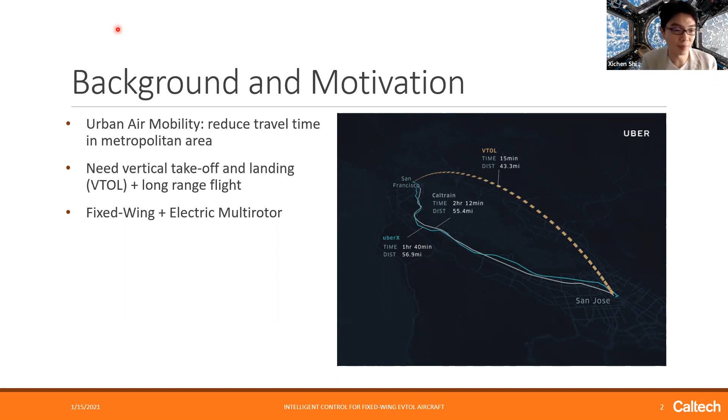It's natural to combine fixed wing aircraft with electrical multi-rotors, because now you can have efficient longer range flight while using multi-rotors to take off and land vertically. But there will be challenges stemming from this hybrid concept, because interactions between different rotors and wings become complex and hard to model in most cases. Furthermore, disturbances from the environment can also be complex to model since we're operating in cluttered urban settings. That means the autonomy onboard the vehicle requires an enhanced level of precision, safety, and intelligence.

Here's a montage of different commercial solutions that have been proposed and prototyped to date. You can see most of them having this main wing and more than 8 vertical rotors in this hybrid design. In the middle of this montage is one of our own CAST autonomous flying ambulance projects. Here we show a render of one of our designs. I eventually built those designs into functional prototypes to test some of the theories we developed for the autonomy aspect.

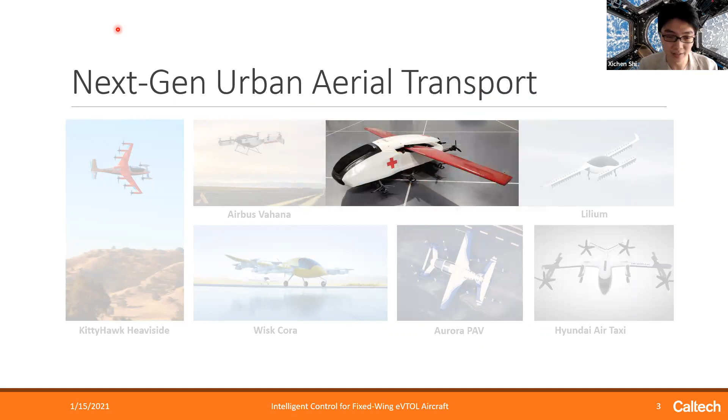So this work is roughly divided into two parts. In the first part, we'll cover various aspects of fixed-wing eVTOLs, talking about why their benefits exist, where those benefits come from, how to design the control system, and how to improve certain design aspects. In the second part, we'll discuss more novel methods in learning, as well as in actuation delay compensation.

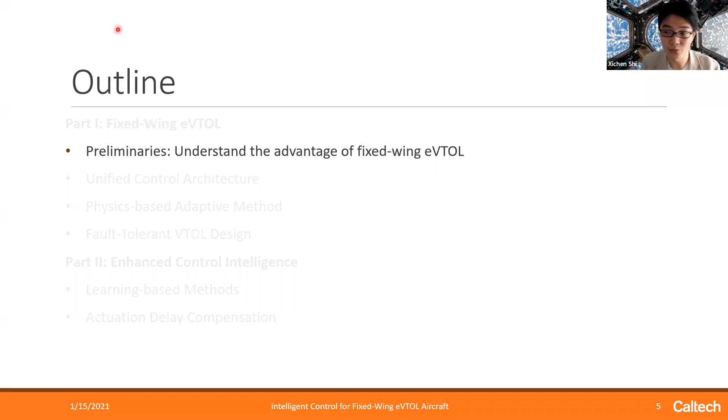Let's first lay some foundations and try to understand what is the advantage of having a fixed wing eVTOL. We can use disk momentum theory to understand, for a rotor in ascending, hover, and descending flight, how much power is required for a certain area of the rotor generating a certain amount of thrust. By balancing the mass, momentum, and energy equations, we can eventually get a relationship calculating the induced power needed to satisfy those thrust generation needs.

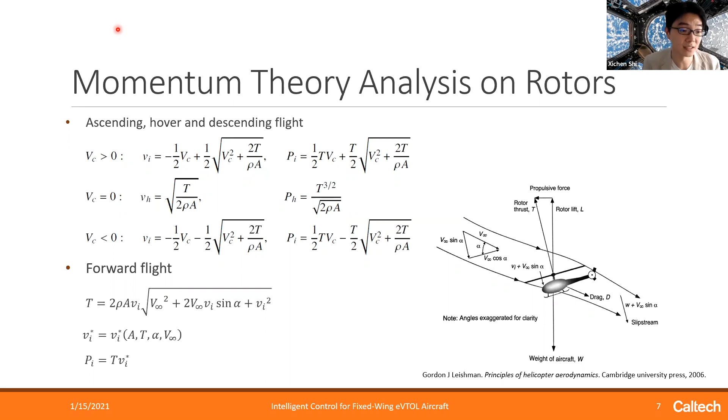Similarly, we can do this for forward flight, except it's a more complex case here, because now your flow can be coming at an angle of attack with respect to the rotor plane. Nevertheless, we can get a similar relationship using the thrust generated and the induced velocity from the rotor plane. Apart from induced power, there's also rotor profile power, which is the power needed to rotate a rotor through the air, and also the amount of power needed to overcome the forces generated on the wing.

For battery or electric vehicles, we have a battery model that determines how much time the battery would last given its capacity and the power load. Now, putting everything together, what we try to understand is how much power is needed for different flight modes.

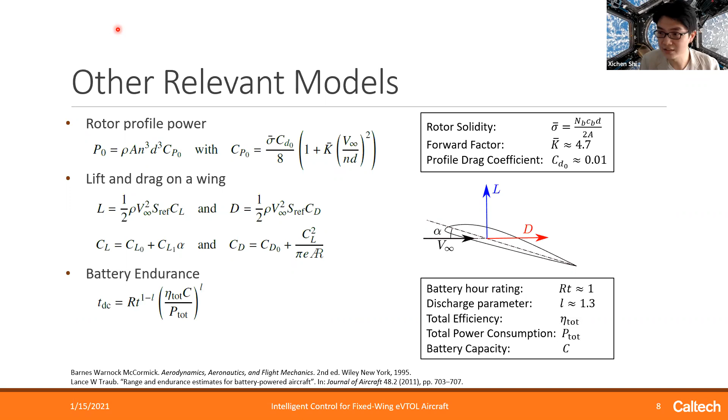It's a simple case for hover flight: all your vertical rotors would be balancing out the weight of the aircraft. Moving on to VTOL forward flight, now your rotors tilt the vehicle in the direction of flight. At the same time, the rotors satisfy both the weight and the drag caused by the aircraft moving through the air. Additionally, some downward lift may be caused by a downward angle on your wing surfaces.

For more mixed flight modes, your wing will be generating most of the lift to counterbalance the weight, with any additional lift compensated by the vertical rotors. In this case, you'll be flying flat and your back cruise rotors can be used for compensating for drag.

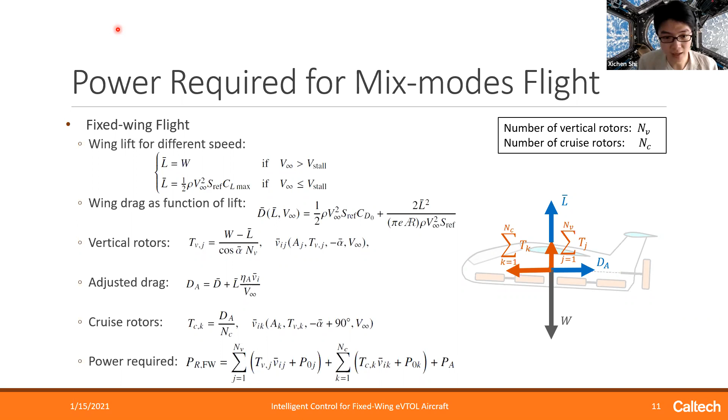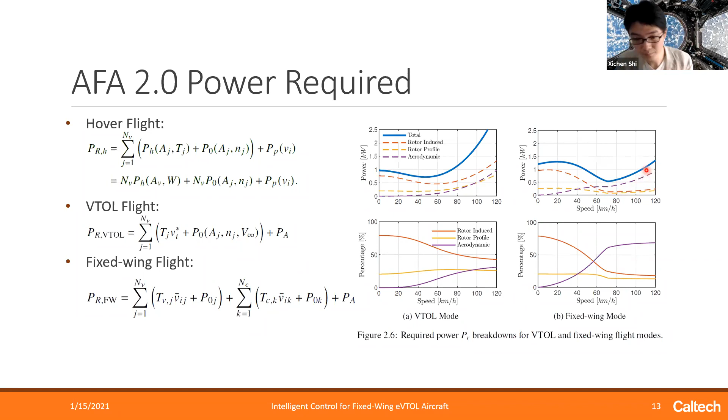We can compare them side by side and also incorporate the electric range equation and battery capacity equations to calculate the amount of time your aircraft can stay in the air—what we call endurance—and the distance your aircraft can travel, or its range.

The graph on the left shows the power required and the endurance. On the right is a pseudo thrust, which is power divided by forward velocity, and the range. As you can see, even in this small fifth scale model, we can achieve 2 times improvement in both range and endurance, and we expect this to also hold for larger scale aircraft.

This is the main reason, using first principles and physics, we can understand the need for a fixed wing VTOL hybrid. Xichen, did you define what AFA stands for? Yeah, we did—Autonomous Flying Ambulance, which we have at Caltech.

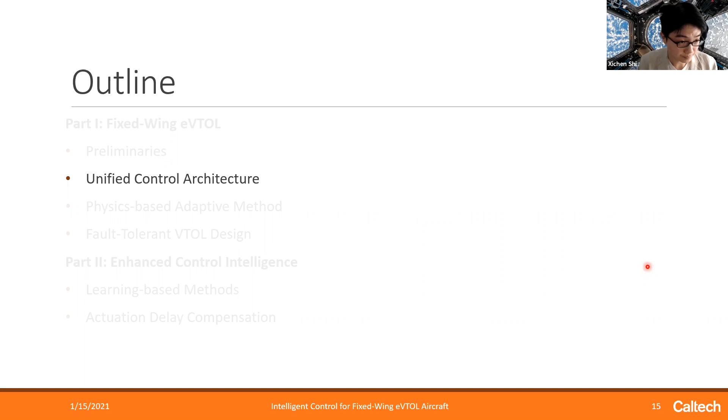So having the aircraft now, how do we design a control system for it? We already know that for VTOL multi-rotor flight, the aircraft will tilt in the direction of flight for the thrust generated by the vertical rotors.

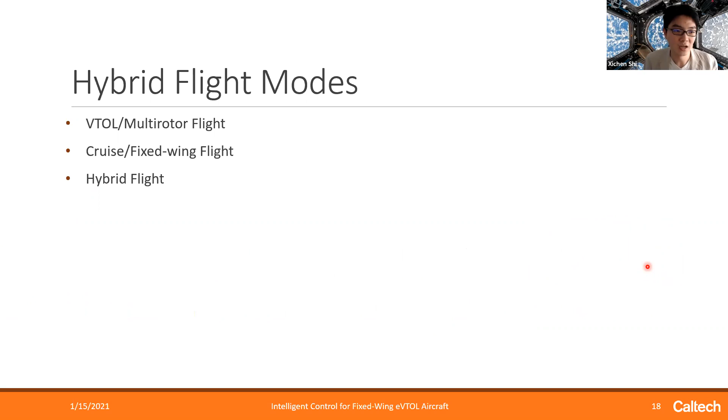For cruise flight, the wing generates lift while the back rotors generate thrust for flying forward. Our hybrid flight will have something in between: at lower flight speed you fly like a VTOL, and at higher flight speed you transition into a fixed wing aircraft.

There was a lot of prior work trying to understand how to transition from one mode to the other. Usually this requires two controllers, one for each flight mode, stitched and switched together. If there are tilt angles, you can schedule the tilting and control accordingly. If you have a good model of the entire craft, you can optimize it offline and use that trajectory for the online transition.

Or, if you have enough computation power, you can actually solve everything online. Although in practice this isn't very likely, due to the complex model and the computation requirements, since the computation hardware on these flying vehicles is typically smaller.

So in our case, we propose a framework based on feedback control design, where we use the same position, velocity, and attitude controllers throughout different flight modes, tying everything together using force allocation and control allocation blocks.

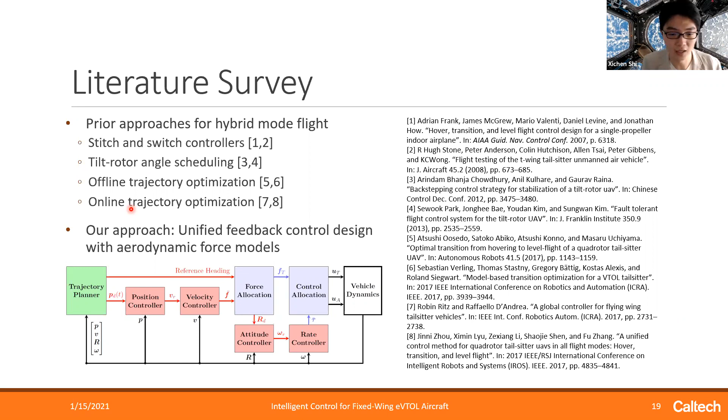For the thruster components, we usually use a model that's linear in the square of rotation speed to calculate the thrust and torque generated by each thruster, and we combine them based on their configuration—a linear mapping from individual thruster forces to the total thruster force and torques.

For aerodynamics, we use non-dimensional coefficients to represent different aerodynamic aspects by calculating the angle of attack and angle of sideslip, which are the relative angles of the wind onto the airplane.

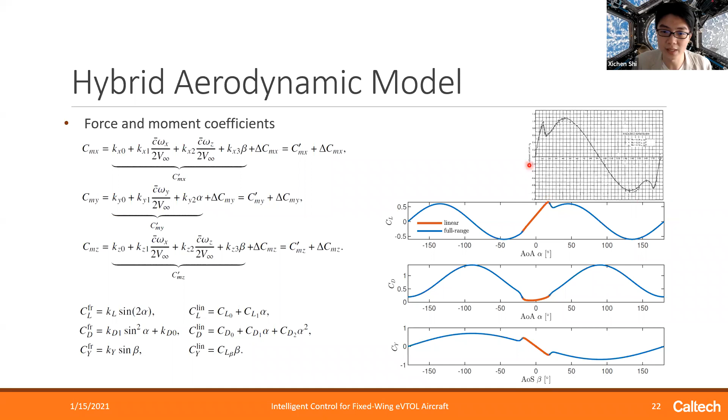We use a blended method to combine a linear aerodynamic model with a nonlinear one, because in the linear region you have a monotonic rise of the coefficient with respect to certain angles, followed by a stall region. Across the full range from -180 to 180 degrees, you see a more sinusoidal or trigonometric relationship. This model can be tuned to agree pretty well with experimental data tested on wings and airfoils.

Now, our architecture consists of several parts. First, we use force and torques as control input to design position and attitude control. It depends on the force that's being commanded. We have to allocate the force by determining the attitude, R_d, which will determine how much aerodynamic force we can generate.

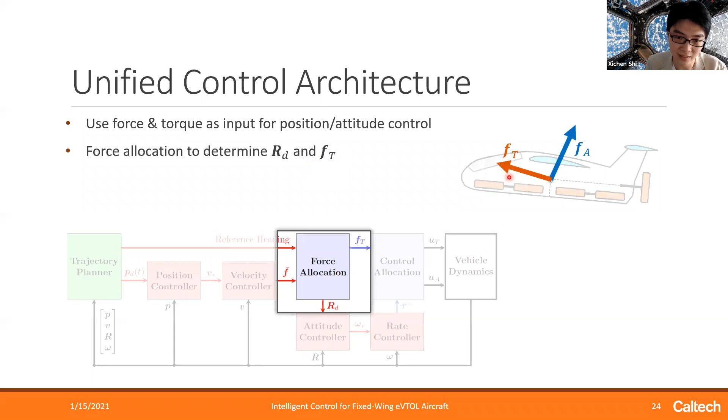And then the control allocation will determine individual thruster forces and also aerodynamic surface deflection, if there is any. Using force and torque to design controllers makes the problem very easy.

Here we just present a simple globally exponential position control by using the force as the input. We can prove this has nice properties, given that your commanded force can be satisfied within some bound.

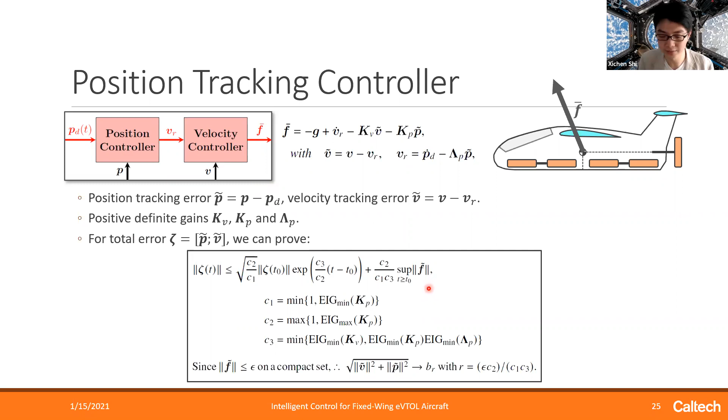So for force allocation, the first step is determining desired attitude. For low speed, all we have to do is ignore the aerodynamic forces and try to align the rotor in the direction of flight, just as a multi-rotor would fly.

For higher speed, you will have to prioritize wing lift by calculating the desired angle of attack, and then try to get a rotation matrix from our current frame to the desired frame.

And then, looking at the current state of the aircraft, we can subtract the amount of aerodynamic force that we estimate the aircraft is generating from our desired force, and let the rest be satisfied by the thruster forces.

But oftentimes it's not possible to satisfy all kinds of thruster forces, so we apply a mask to get to it. For example, in this case, only body Z and body X force are achievable, where Y force is usually non-achievable.

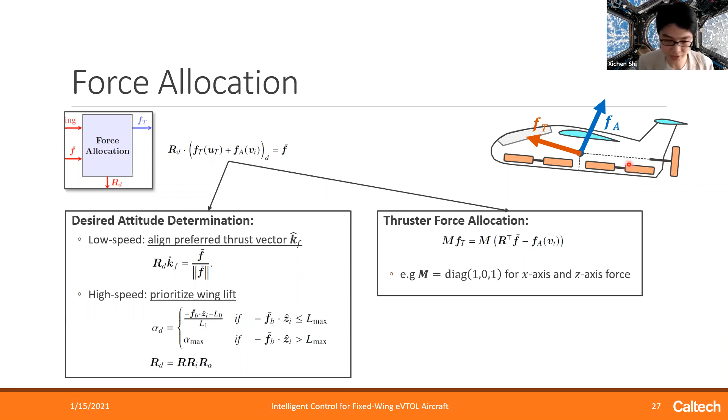Now the next problem is control allocation. The problem is, given the thrust and torque, what are the individual commands given to the rotors? We know the mapping is a linear mapping.

W equals BT. W is the combined force and torque; here we call it the wrench. Usually we have a feasible control space, the maximum amount of thrust each thruster can generate.

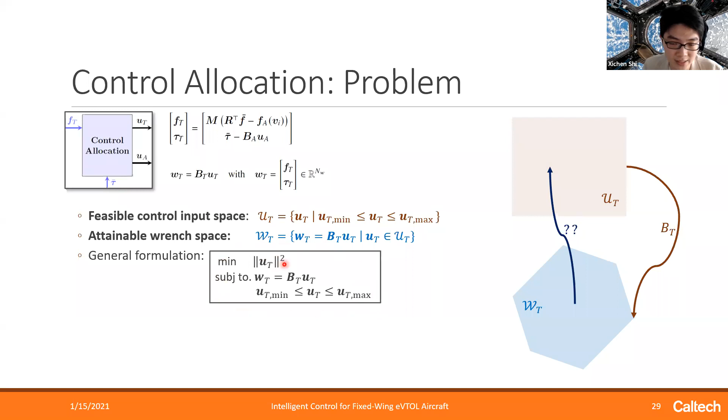So the problem would be, graphically, given something inside the attainable wrench space, what is the control inside the feasible control space? It can be formulated as a QP to minimize the effort of control while satisfying all the needs and feasibilities.

So obviously you can solve that optimization problem, but it would actually be slower than needed, because control allocation happens on the lowest level of the entire hierarchical architecture and requires the fastest update rate. So in practice, often we will use a simple linear mapping.

For example, a right pseudo inverse. The right pseudo inverse is the optimal solution to the original problem if we don't have an inequality constraint. However, simply applying this right pseudo inverse onto this polytope attainable space here, you wouldn't get the feasible space. You would get some space that could lie outside the feasible space, meaning you will have saturated control inputs.

So how do we handle it? One solution we propose is to have an offline optimized inverse mapping, BT prime, so we can minimize this with some problem setup.

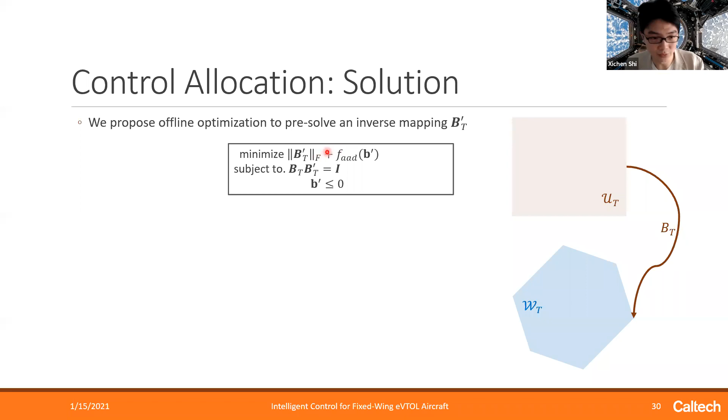We try to minimize the potential effort of control. We also want each rotor to have a similar amount of thrust during allocation, so their deviations are small. We can also fit an applied range space, something like a hyperrectangle, inside this polytope, such that we can show in simulation that by applying this optimized inverse, the space you recover will always be inside the feasible control space, so we avoid the saturation problems.

Or if you still have saturation, we can also do a recursive control allocation, by eliminating saturated control signals one by one, recursively.

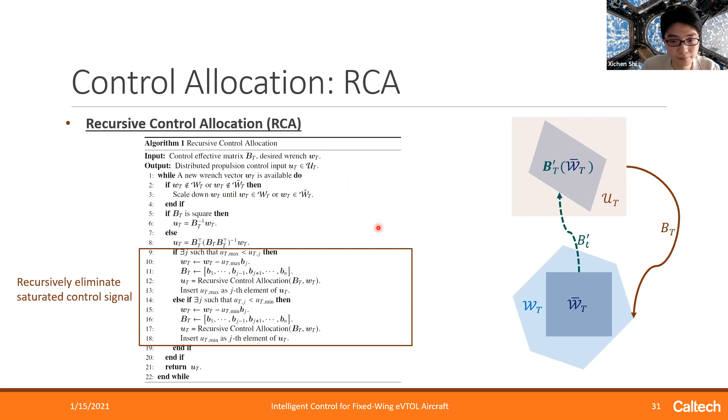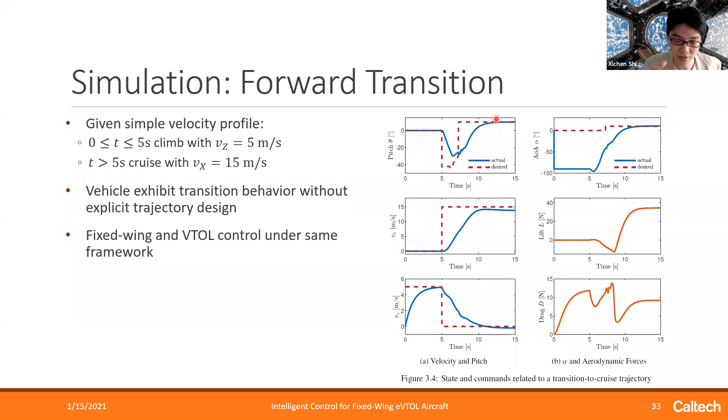Putting the proposed architecture through a simulation environment, when given a very simple velocity profile, simply telling the aircraft to go upwards for 5 seconds at 5 meters per second and go forward at 15 meters per second, the aircraft exhibits a very natural transition trajectory. This trajectory wasn't designed beforehand, rather it's exhibited by this architecture intrinsically. In the beginning, the allocation tells the aircraft to be flat, 0 pitch, going upwards. At some point it pitches downwards to gain speed, and when there's enough speed, it goes back to around 0 pitch for fast forward flight. All of this is achieved intrinsically within the architecture.

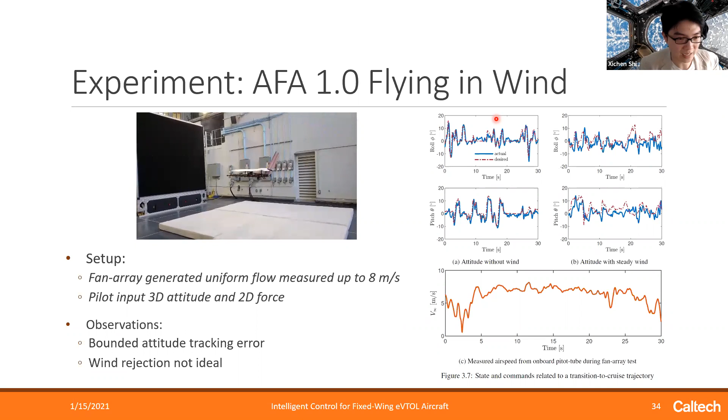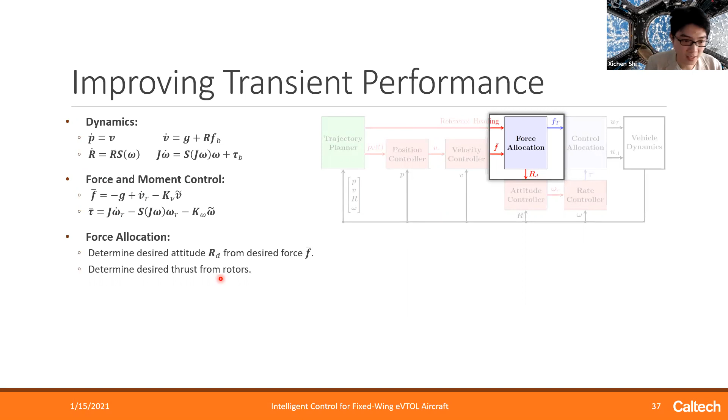What we propose instead is a physics-based adaptive method. There's a lot of adaptive control literature, for example on linear parameter models, or composite adaptation incorporating both tracking and prediction errors. For flight control, there are works estimating angle of attack and angle of sideslip online, but mostly for estimation purposes, not control. However, there has been work on adapting aerodynamic coefficients or neural network parameters. In our case, we know force allocation is key to achieving very accurate precision tracking, and the key to that is accurate force estimation.

In this part, we use a simpler vehicle with multi-rotors, fixed wing, and forward rotors, incorporating a novel sensor that gets more information out of the flow. We use the same rotor model, but augmented with the side force of the rotor, which becomes significant during forward flight, and we use the same linear and quadratic aerodynamic models with respect to lift and drag as before.

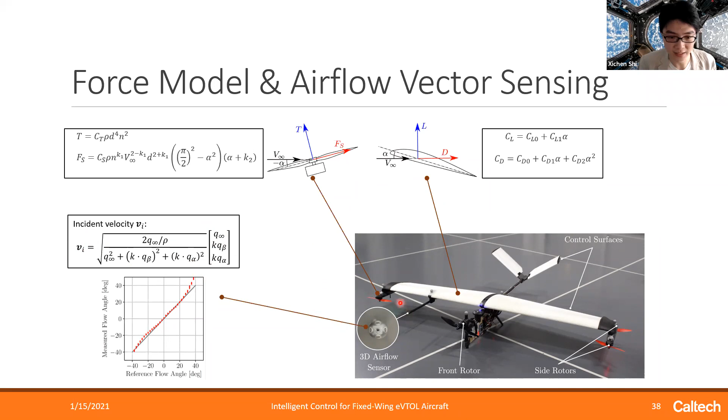We have novel sensors that use differential pressures to back out an incidence velocity onto the main wing. Combining them together, we can write the body force as a linear combination of parameter vectors and a basis function matrix.

With this form, we can design a composite adaptation scheme that adapts both the tracking error and the prediction error. The prediction error is simply the difference between the measured acceleration after filtering and the predicted acceleration after filtering. We can further augment this via a recursive least square method with exponential forgetting, so the online adaptation scheme is effectively solving a least square problem with an exponentially decaying window.

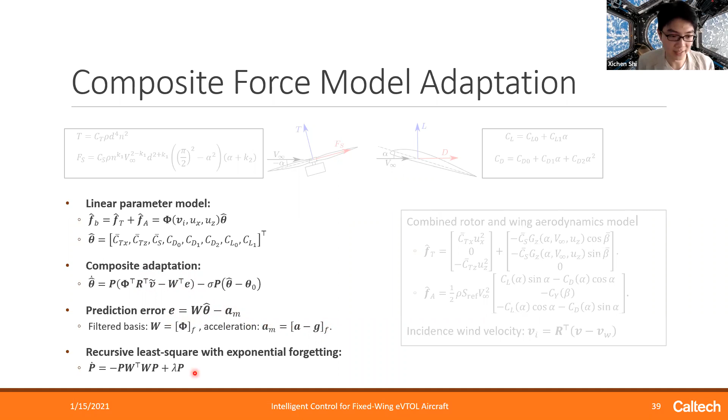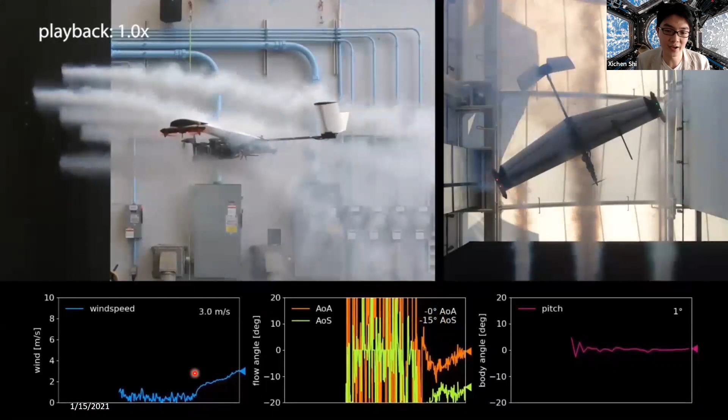We test this in the fan array wind tunnel in a motion capture environment for feedback position control. In the first showcase, as the airspeed ramps up, we see the aircraft align itself with the flow to satisfy the additional aerodynamic forces on the wing. As speed ramps up, angle of attack and angle of sideslip, initially unregulated, eventually become regulated toward some angle determined by the force allocation, and the aircraft pitches up slightly to generate the thrust and lift needed from the wing.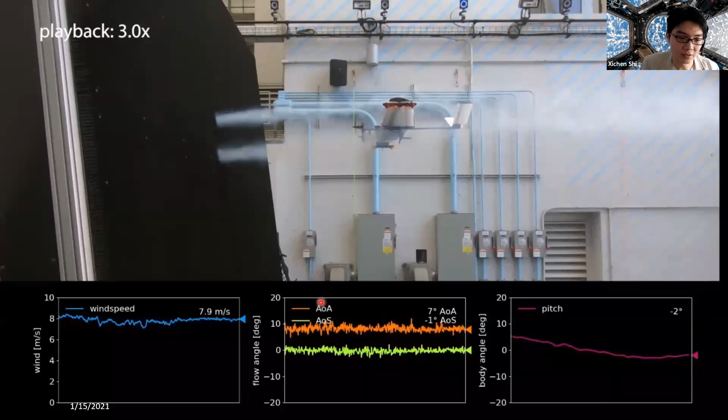In the second showcase, we tilt the entire wind tunnel from 0 to 9 degrees and back to 0, while keeping the wind speed relatively constant, so the wind direction changes. Internally, the allocation keeps the angle of attack and angle of sideslip relatively constant, but we see a varying pitch as the aircraft tilts into the wind and then back flat again, to fly according to what the wind direction demands.

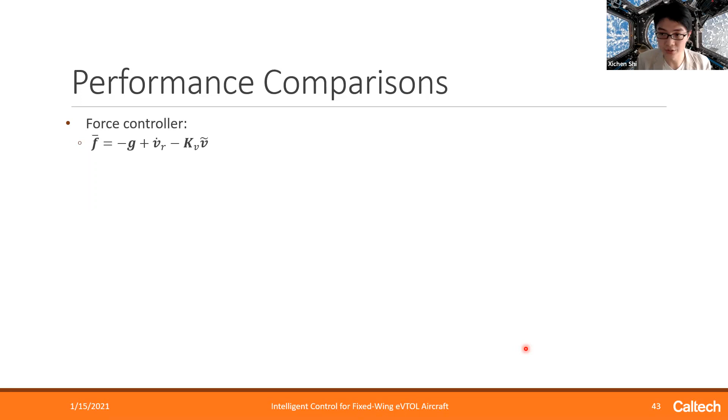So we have this simple force controller as before, augmented with a composite adaptive controller. We would like to compare it with a baseline PD and PID controller where the parameters are fixed. Those fixed parameters are obtained through wind tunnel testing, and they're fairly accurate for steady state purposes.

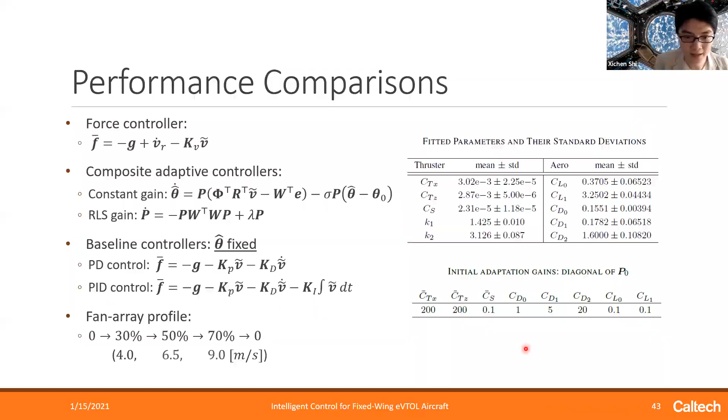But as we'll see for transient effects, they don't perform so well. In this experimental case we'll show next, we'll be ramping the fan array profile from 0 to 30 to 50 to 70%, and then suddenly shut it off. That would roughly correspond to 4, 6.5, and 9 meter per second wind. Now let's first look at PD versus PID controls.

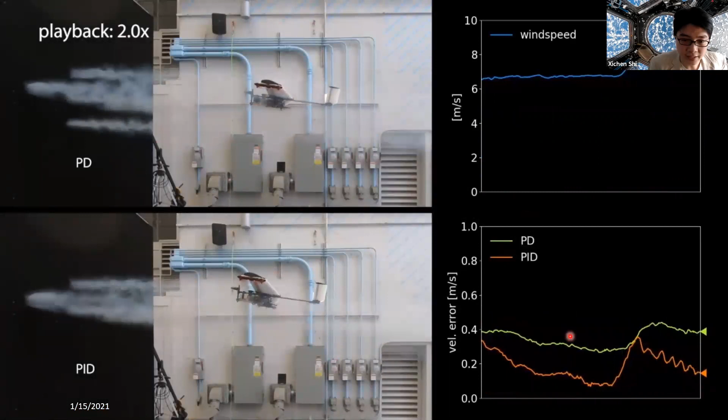The upper plot is PD, the bottom is PID. It flies pretty steadily, except every time the wind ramps up, you see a sudden drift from its held position. The integral control comes back over time, given its integrated power in the I term. But in the end, with a sudden drop off of velocity, you get a huge overshoot from the PID.

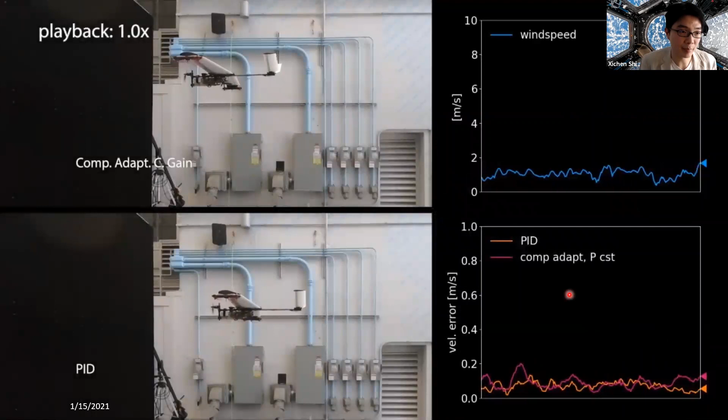Now we can compare PID against a composite adaptive controller. The upper graph is the composite adaptive control, here is a constant gain. So every time, the transient effect from sudden ramp up or ramp down of wind is minimized. Basically there's no visual difference in precision tracking performance when the wind changes, and during the sudden shut off, the overshoot is also minimized.

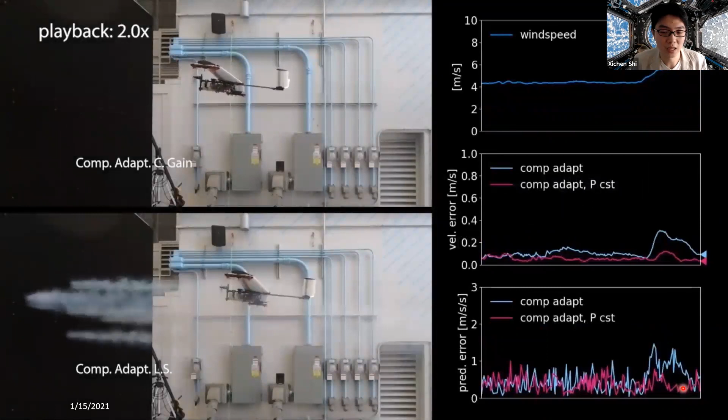The additional comparison we did is comparing the constant gain versus when the gain is updated in a recursive least square fashion. We expect recursive least squares to have better prediction and tracking performance, but in our case it actually did not improve the performance further. In some cases, you can see the constant gain outperforms the RLS.

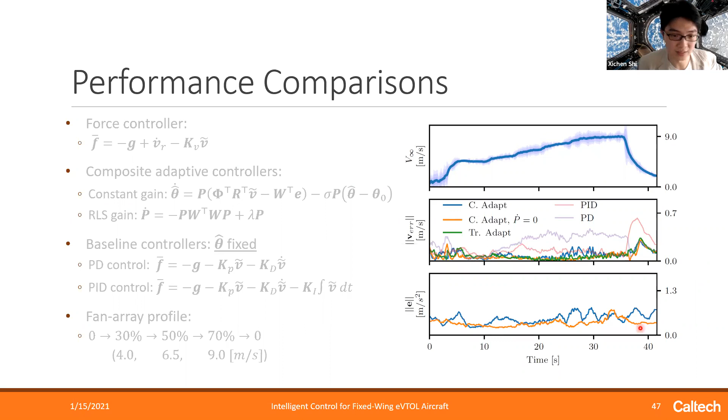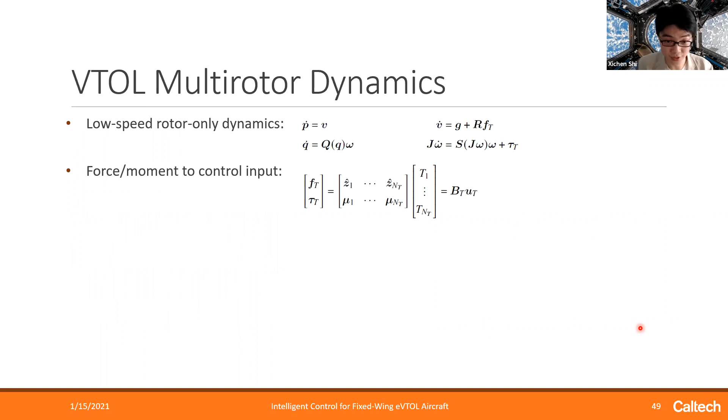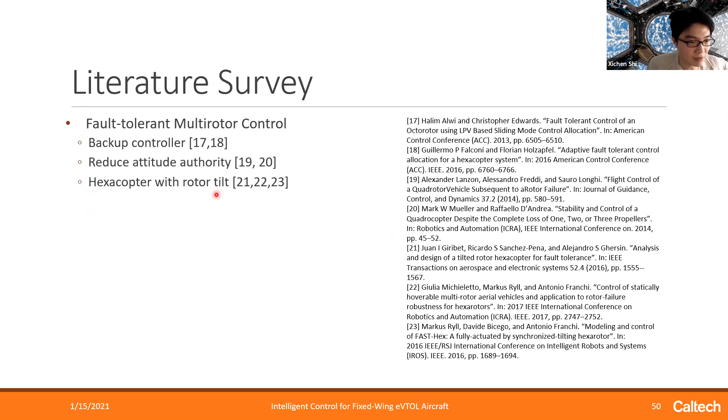The prior work on fault tolerant control usually focuses on having a backup controller whenever a fault is detected, at the cost of reducing attitude authorities. For example, a hexacopter with 6 rotors would lose yaw control completely in the event of losing a rotor, but you can recover some of the authorities by having rotor tilting out of the plane.

So in this work, we focus on the design aspect: how to get a configuration that's most optimum for different failure cases. First, we define a static hover as eventually a problem of just reaching 0 attitude, because through position and force control, the convergence of attitude will eventually become 0 in a static hover.

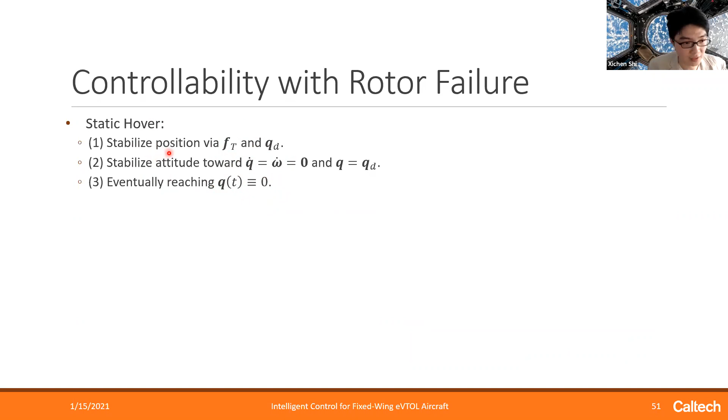Given the definition of null controllability as the system's ability to return to a 0 state given feasible control inputs, we find that for the attitude subsystem to be null controllable, meaning for it to become stabilized back to 0 attitude, it's required that the thrust, the torque, 0 torque, is in the interior of the moment space. So what does it mean?

It means that basically the origin, when you have a moment space in R3, your origin has to be on the inside of it. So it cannot be on the boundary or on the outside.

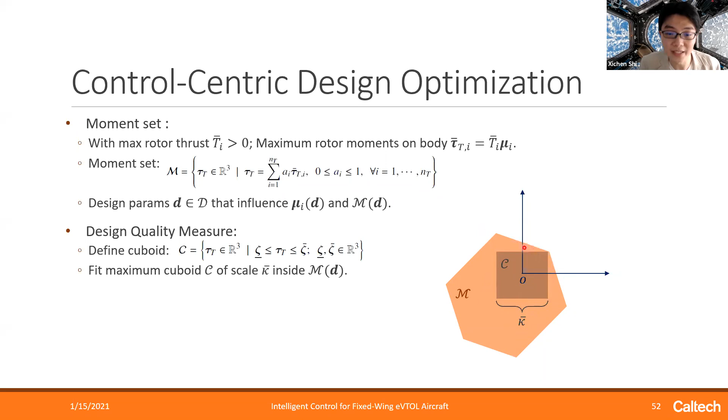We define this moment space by using the maximum thrust and the rotor configurations. We know this moment space could be determined by some design parameters, such as rotor locations or orientations. We define a quality measure of controllability by putting a cuboid fixed at the center at origin with the maximum size inside this moment space, and we define its scale as kappa bar, and that's our metric. Basically, the bigger this box is, the bigger the controllability of the aircraft in various cases.

Now, the fault tolerant design procedure is as follows. We first have a set of all possible failures and also the parameter space. For each of those elements, each failure case, each design, we can optimize this convex problem to solve for that metric kappa bar we just discussed.

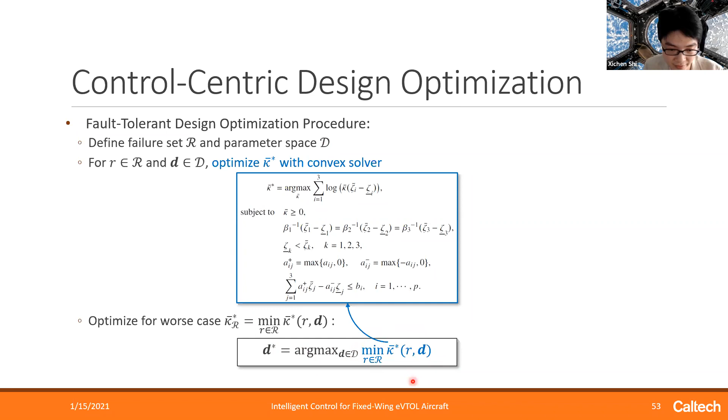And then we optimize for the worst case behavior. We maximize this metric for the worst case failure case, worst case rotor failures. So among all failures, what is the minimum, and we try to maximize the minimum.

So here's an example with that AFA 1.0, by designing the rotor tilt angles symmetrically, bounded from 0 to 20 degrees. In this case, it turns out we can have an optimum design parameter of 19 degrees and 13 degrees respectively.

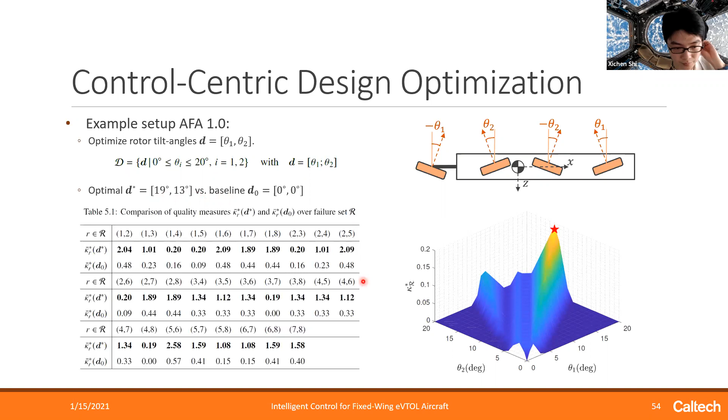Comparing to the baseline of only non-tilting at 0 degrees, we can see the controllability metric improves on all rotor failure cases. Especially when failing rotors 3 and 7, the baseline case will have that origin on the boundary of the moment, meaning it cannot generate the uncoupled moments in different axes.

Whereas we can recover some controllability by having the optimal design, you can see the origin is on the interior here. In another case, when failing rotors 1 and 8, we can see a significant increase in the moments in the metric by fitting this cuboid inside this moment space.

For the same failure case 1-8, we simulate the failure in flight and compare control performance by perturbing roll, pitch, and yaw axes separately. For baseline, roll and pitch perturbations have basically no effect on performance, as position holding is relatively well maintained, except when you perturb yaw. During negative yaw, you have issues tracking the desired trajectory because of the loss of authority in the moment space. With an optimal design, we recover some control authority, so this no longer happens.

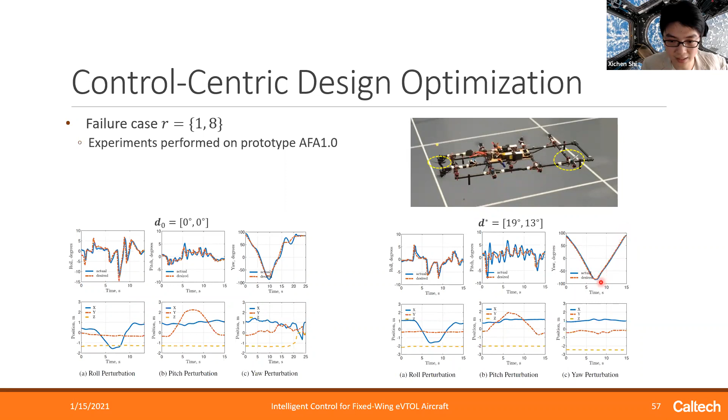All right, so before we move to the next part, are there any questions?

Now let's talk about how we improve control intelligence using learning-based methods, in particular a neural network-based method.

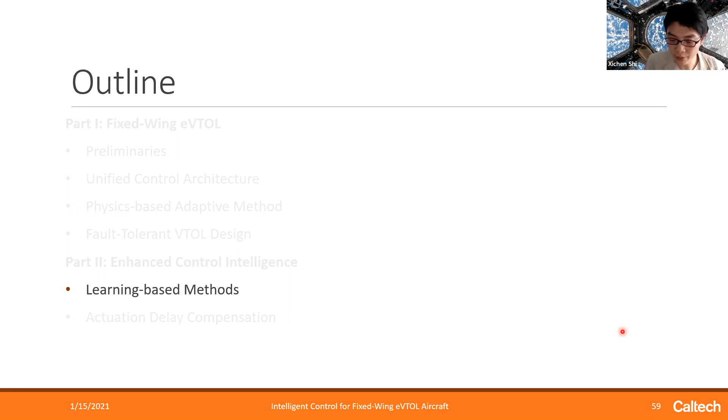So far we have body force and body torques that we model via thruster forces or nonlinear or linear aerodynamic forces. We're pretty confident about the thruster force model because it agrees well with experiments. The aerodynamic model, maybe not so much, so it's natural to think about a data-driven approach for approximating FA and tau A using deep neural networks.

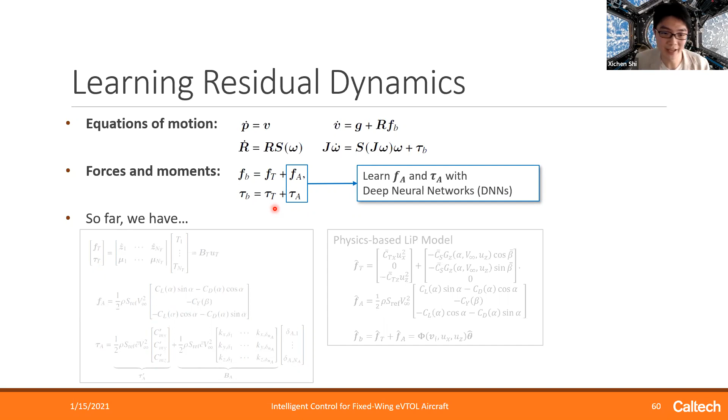Given a lot of research on deep neural networks, there's also been a lot of combined DNN and control work. People have used deep neural networks for system ID, for example on helicopter dynamics, for generating trajectories fed to a downstream controller, and reinforcement learning with continuous actions for control applications. We could also learn inverse dynamics through a DNN and apply a controller to it, or learn Lyapunov functions.

In our case, we'll present two approaches: one is designing a feedback controller when part of your dynamics is represented by a DNN, and also when your full dynamics is represented by a DNN, how you would design controllers and observers and how to train them respectively.

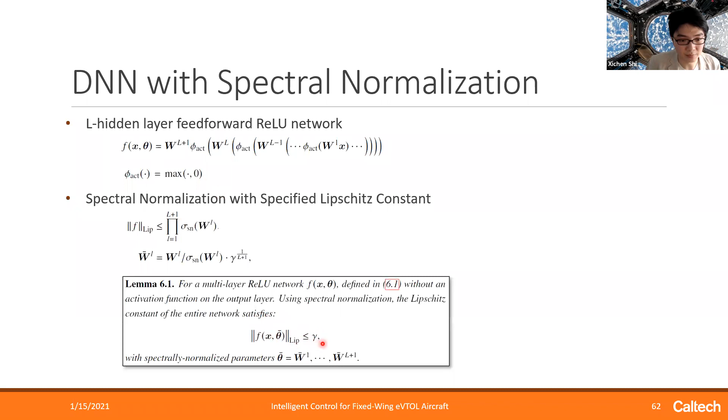Given an L hidden layer feedforward network, where W is the matrix of weight parameters of each layer and phi is the ReLU activation function, it turns out we can regulate the Lipschitz constant of this entire network through some determined gamma by applying spectral normalization on each weight layer.

For control, we want to satisfy the desired force as from the position controller as before. In the case of a multi-rotor, the thrust from the rotors equals the desired force subtracted by the aerodynamic contributions. So we equate that into solving the control allocation problem again, except now our control input shows up on both sides of the equation, because adding this DNN makes the entire problem non-affine in control.

So what we propose is a fixed point iterative method: feeding the control input from the last time step into the neural network, subtracting it from the desired force, and then doing inverse mapping on top of it. It turns out that for this to converge and work, the Lipschitz constant of the network multiplied by the singular value of this inverse matrix has to be less than 1, meaning the entire mapping has to be a contraction.

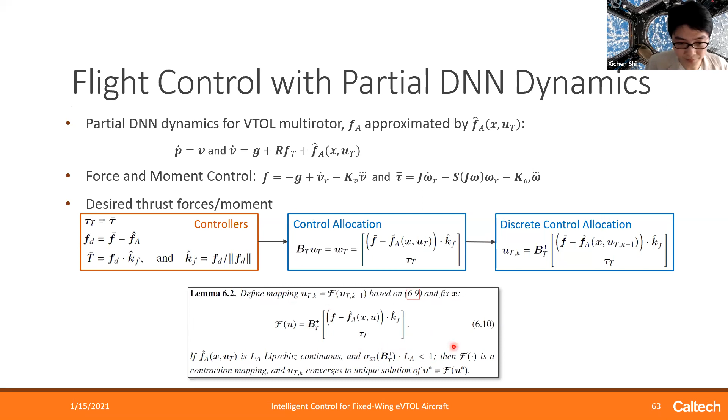With some assumptions — that the projected trajectory is smooth and bounded, that our controller updates are fast enough against some scale factor of our error, and that our learning is effective with bounded learning errors — we can prove the entire closed loop system under this controller is globally exponentially stable, given the gains, the learning error bounds, and the Lipschitz constant of our network.

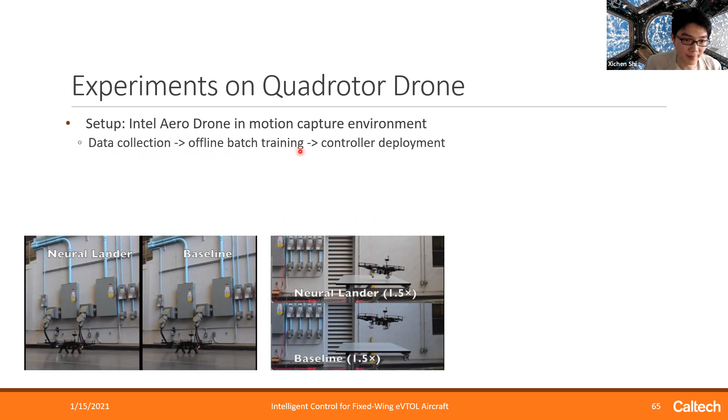To show the results, we apply the method on a quad-rotor drone, the Intel Aero drone here, by doing some data collection first, then offline batch training, and then deploying the controller online.

So on new domains, which are domains we haven't collected any training data on, the spectrally normalized DNN shows better smoothness in its functional predictions, whereas the non-spectral normalized ones have large deviations given data that hasn't been seen before. In practice, this corresponds to a sudden failure of the controller at these data points because it has predicted very large and erroneous forces.

Now for closed loop control performance, we can outperform baselines, for example in landing, by having a very smooth and zero speed touchdown on the ground, where the baseline can't even touch the ground without an integrative term, because it's not considering the actual additional cushioning effect.

Similarly, for vehicles flying across tables, our controller can get as close to the table as possible, while the baseline has trouble accommodating the additional cushioning force from the table, also dropping off when it reaches the cliff.

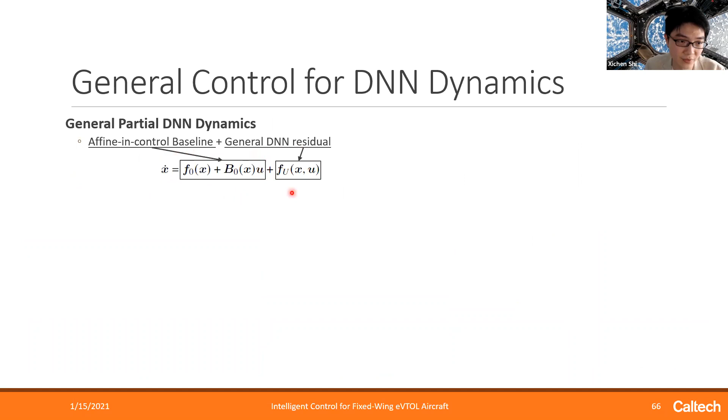So in general, the method applied on flight control can also be done on any fully actuated, affine-in-control baseline dynamic system, augmented by a general DNN residual dynamics that's a function of state and control. We can apply the same principle and prove the same stability using that controller.

The controller is basically the inverse, then feeding back the control input from the last time step. Now this is all good except there's a harsh constraint on the approximator on this residual: the Lipschitz constant of this network has to be less than 1 over the Lipschitz constant of the inverse of that matrix.

That's already known, and when it's known, that means this Lipschitz constant is fixed. In practice, there could be a problem in the sense that when you don't know these additional forces and they become too large or non-smooth, this condition wouldn't hold and you wouldn't get a good controller from that.

So in general, we would potentially represent our entire dynamics as a deep neural network, then design a controller based on that. But the problem is with non-affine controls, how do we do it? Theoretically, we can do it by just solving this equation.

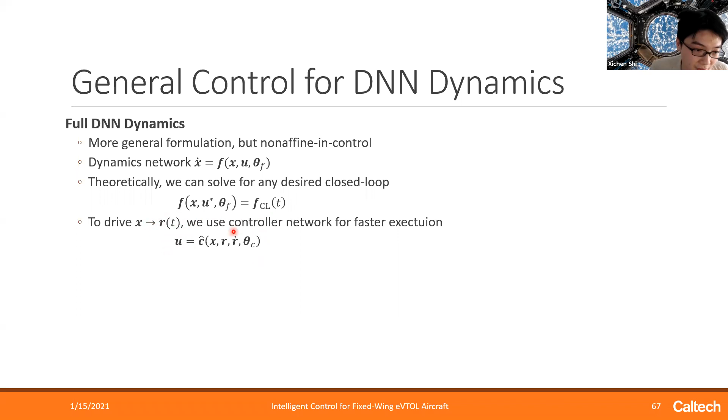We already have the dynamics learned somehow. We equate it to some closed loop behavior we want to achieve. If we can solve it, we have a controller. But instead, we propose to represent our controller with another neural network, parameterized by theta c. Now, how do we train both networks?

So we first have to do some data collection. Given the method we're going to propose is off-policy, this collection can be done by some experts, or can even use the same untrained controller we have to do some random exploration.

During the first stage, we will learn the dynamics by looking at the state, control, and state derivative pairs, and doing supervised learning to figure out what the transition function is. So this stage will learn the parameter theta f for the dynamics network.

In the next stage, using the dynamics network that's already learned, we fix that parameter theta f, and feed it into a Lyapunov derivative estimator. So this is propagating one step forward using our dynamics that's already learned and using our controller that's being learned.

So we optimize this loss function. This loss function penalizes any positive terms of this expression here. So when V dot plus alpha V becomes negative, we penalize any positive terms. When this term becomes negative, the system is considered exponentially stable. When it's not, there could be some issues. That's why we penalize it. So overall, by minimizing this loss function, we can train the network parameter for the controller, theta c.

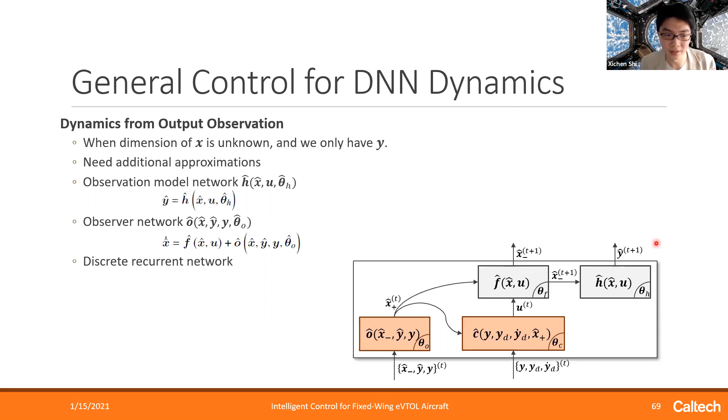So how do we learn it? We learn it using similar methods as before. The data collection is also off policy, so it can be through some expert controllers or some random controllers. But if we're to apply this online, we do this recurrent structure as before. And when we're doing learning, instead of sampling randomly from the data, we actually have to have a sequential trajectory, because our RNN formulation will have to train on a trajectory.

During the dynamics learning stage, we learn by optimizing the dynamics network, the observation model network, and also the observer network. In the control learning stage, we fix these three networks and only learn the controller using a similar approach as discussed earlier, except now it's in a discrete sense. This overall framework can, in principle, learn a more general form of dynamics when it's all represented by a DNN.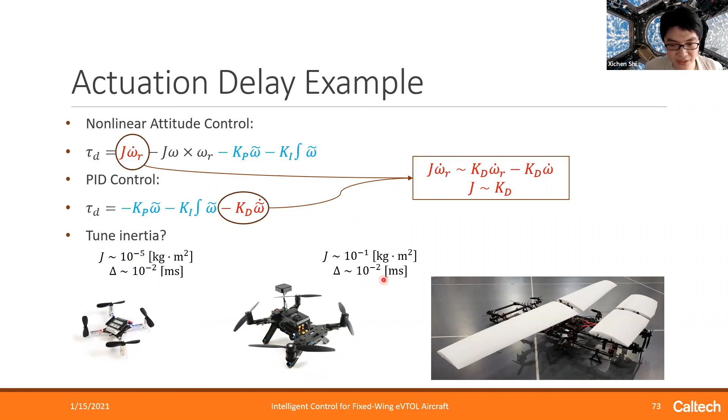But when I moved to smaller drones, tuning inertia no longer worked, except when you tuned it 10 times larger than its original intended value. Further investigation showed that the inertia of smaller drones is several orders of magnitude smaller than the bigger ones, while the delays on the motors are on similar time scales. So the problem must be coming from the delays, and how do we compensate for it?

Delay compensation has a long line of prior research. People have used PID or PIPD controllers on linear systems, and there's been vast work on predictive control by continuously integrating states for future predictions. But these require partial differential equation or functional differential equation analysis. In our case, we still propose a predictive controller, but we focus on numerical integration instead of continuous, and our system updates in a sample-based or discrete fashion.

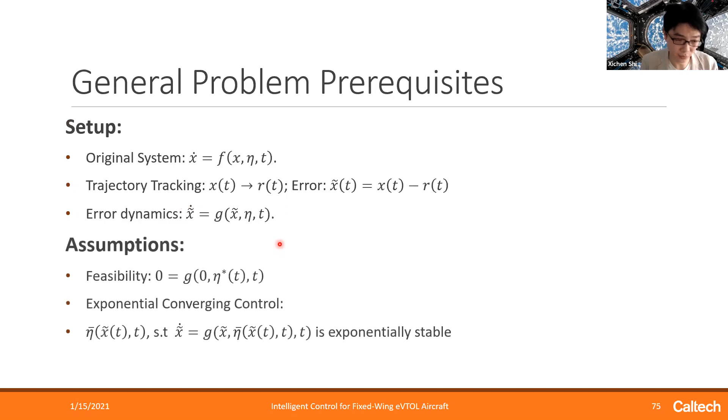Some mathematical setup - skipping through details, but the basic gist is there's the original system, undelayed. We consider, for example, that we already designed a controller for our quad rotors, but didn't consider the delay. We know there's a controller we already designed, eta bar, designed for the undelayed system, that's already making the undelayed system exponentially stable.

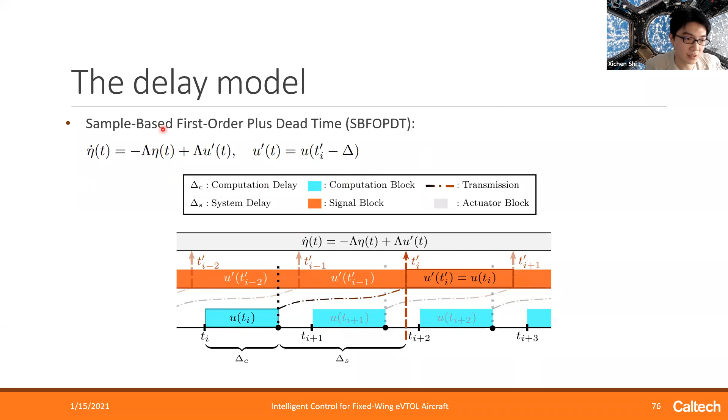And then we incorporate a delay model. In practice, at every time sample TI, we sample some states. We compute a control signal U using this time delta C. We finish computing, we send it over to the actuator with time delta S, the system delay. Now at TI prime, the signal reaches the actuator, and the actuator has to evolve according to a first order delay dynamics that we propose. So the overall model we use here is a sample-based first order plus dead time model.

So the first step we do is accommodate for this first order delay. It becomes very simple - just take this baseline controller we already designed, take a derivative of it, and multiply by this first order time constant. This simple addition can accommodate for first order delay and converges as fast as this time constant allows. But if you want to augment it with an observer, you can make it converge faster than the first order time constant, while paying the price of having observer error in your system.

So we call this general first order compensator eta bar double prime. And then we want to incorporate this discrete delay here, or the transport delay. The old ways, as I said before, will be modeling the system as an infinite dimensional system because of this continuous integrative equation, doing continuous predictive control.

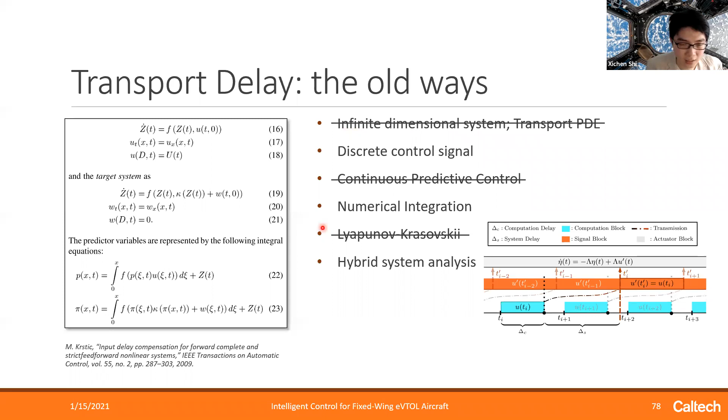And then we have to apply Lyapunov-Krasovskii functionals to do analysis. But we know in practice, control signals are digital, often these days, and discrete. And the integration done on a computer is also numerical, that's also discrete. So the more appropriate analysis will be a hybrid system analysis.

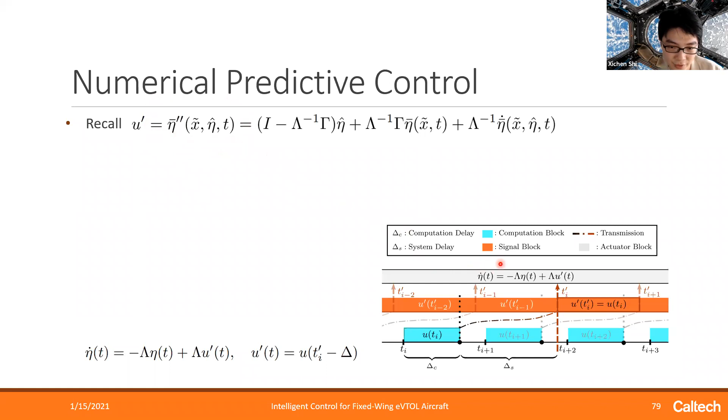So recall that we have this first order compensator for this gray part of the delay that we already designed. So what we want is at TI, we have a sample at TI, and we want to predict what the state is going to be at TI prime.

So we do an integration of our information in a Runge-Kutta fashion. This Runge-Kutta integration has this horizon big delta with a summation of delta C and delta S. Also H is the step size of the integration we're taking, and P is the order of the integration.

For example, RK1 is roughly a first order method. RK4 is the more accurate fourth order method. And in general, the numerical predictive control NPC is just the first order compensator plugged into this predictive state of the future.

A special case to this NPC is when you truncate everything to first order by, for example, letting H equal big delta. You're taking one step integration over this entire range, and it becomes a first order approximation. So this term is very easy to compute compared to the general predictive formulation.

Now we can do some hybrid stability analysis on the system. Omitting the details, the bottom line is we'll have some nice term that we know will make the system converge because of nice controllers applied to it.

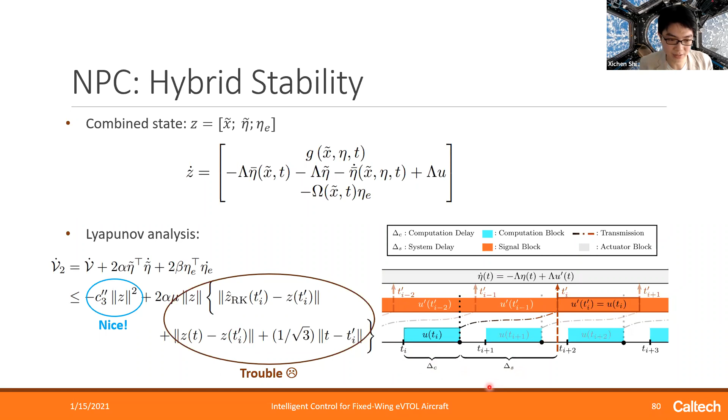But because we have prediction error, we're doing forward prediction, we also have sampling error during this discrete sampling stage. That's giving us some trouble. And we would like to bound these terms somehow.

Overall, we can arrive at a rather complex expression that will be determined by how big the sampling period is, and how big the bound of your prediction error would be, depending on the order and step size you're choosing. Also the error in the model you're using.

So with this, let's call this the control Lyapunov metric, if you will. Using this Lyapunov metric, we can actually get a sufficient condition on sampling time. So if you're sampling super fast, then your system can have some exponential stability under a certain rate of convergence.

And then we want to analyze what the computation time effect is on the overall metric here. So at TI, we're trying to compensate for this jump here, except because we can use different orders of the method and also step size, the delta C can change. And delta C would potentially affect the total delay.

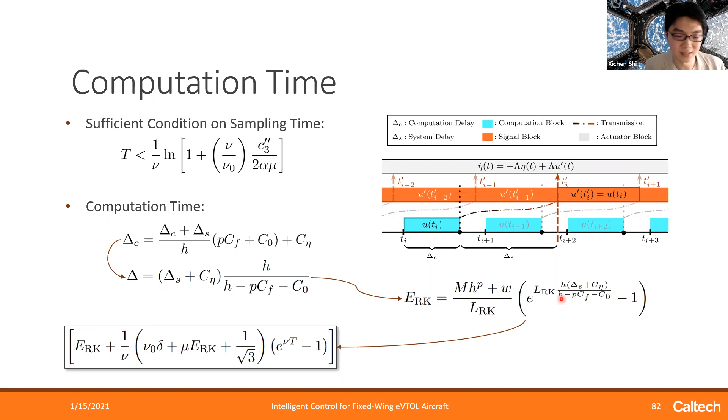So we can express that by assuming some computation model on how long we can use to compute different predictions, different RK methods, and arrive at a general form of the bound that we plug into the metric here. That sort of lets us analyze how computation time would affect this Lyapunov metric.

So let us do that on an example here. The example we use is a double integrator, very simple linear dynamics, except now it has the delayed model added to it. It's also tracking a variable frequency sinusoidal trajectory, making the entire system non-autonomous and nonlinear in the sense of time.

So for this Lyapunov metric we just introduced, we'd like to plot it against computation delay delta C. And what we want to understand is how computation time would affect the performance.

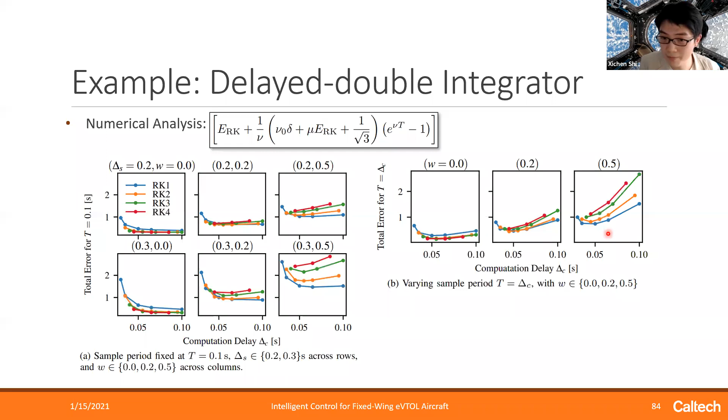So that was just plotting against some theoretical bound, and we can do this in simulation as well. So in simulation, we track trajectory, and we plot the same computation against the root mean square error of the tracking. For both, the left side is fixed sampling time, the right side is variable sampling time. And you can see for fixed sampling time, RK4 outperforms RK1.

In the simple case, changing the amount of computation doesn't matter too much, because we have very fast computation on these systems. But however, when you change the sampling to equal the computation delay, it's almost always beneficial to have a lower time in computations, so that your frequency would increase. So this is corroborated with the prior results we just shown.

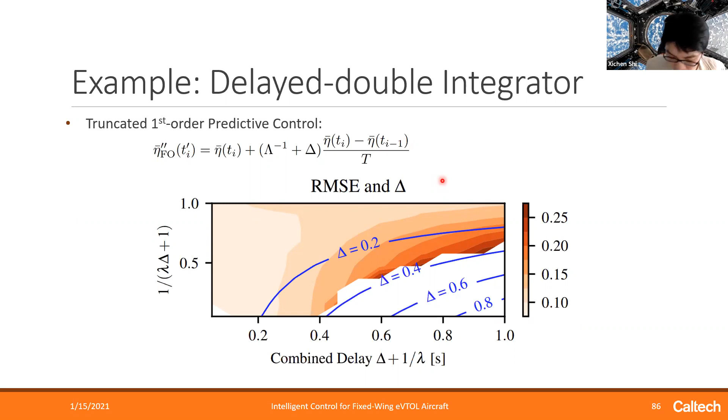Now we applied that simple method, the truncated controller, to a quadrotor system, as we first showed as an example. On this smaller drone, the general delay is on a scale of 100 milliseconds. The augmented controller is simply using our nonlinear one, doing a numerical derivative and multiplying by some time constant that we can tune. This is a separate work we did on the Neural-Swarm paper, which uses a neural network for swarm planning.

But the underlying controller was using this delay compensation controller. So although we don't have a separate comparison result, it turns out that because of the additional aerodynamic interaction, the delay becomes significant. And thus, without compensation, it doesn't even work in any of the trajectory tracking tasks.

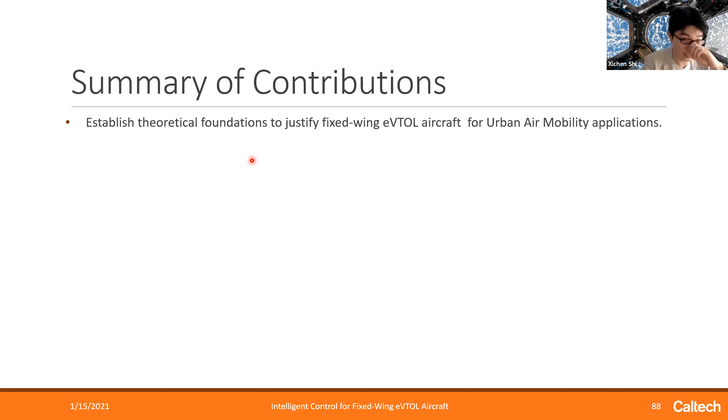All right, so to summarize what we discussed: we established why eVTOL fixed wing aircraft is better for urban air mobility applications. We then moved on to define a set of modules for the unified control architecture for fixed wing eVTOL, and enhanced it with adaptive methods and physics-based modeling, using a novel sensor that can measure airflow vectors. We have a design strategy that can optimize our rotor configurations so it's better against rotor failures.

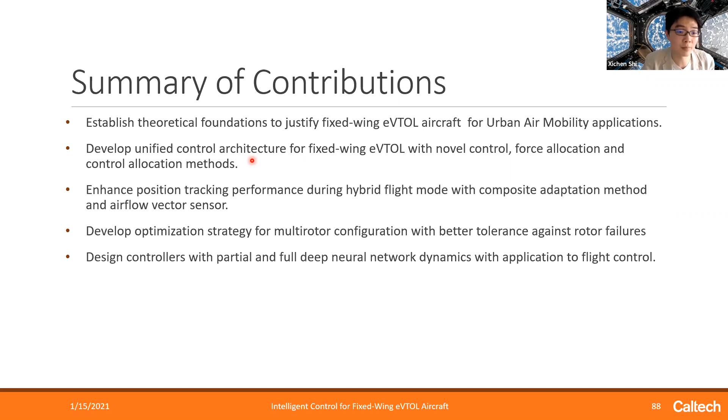And then we propose a method for when the dynamics is partially or fully represented by a DNN, for how we design and train controllers for it. In the end, we have augmentations that can transform existing controllers for undelayed systems into controllers that can compensate for dynamic and transport delays, and that work on practical digital control systems.